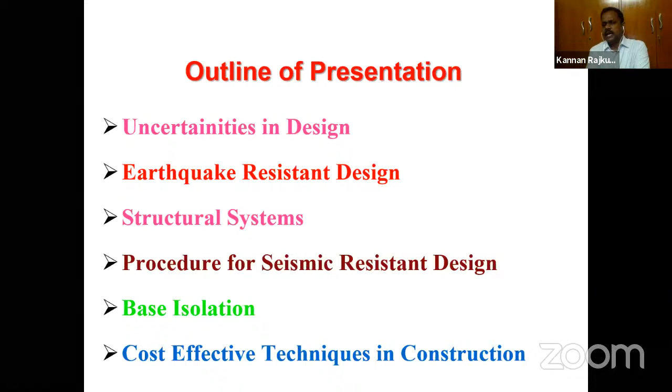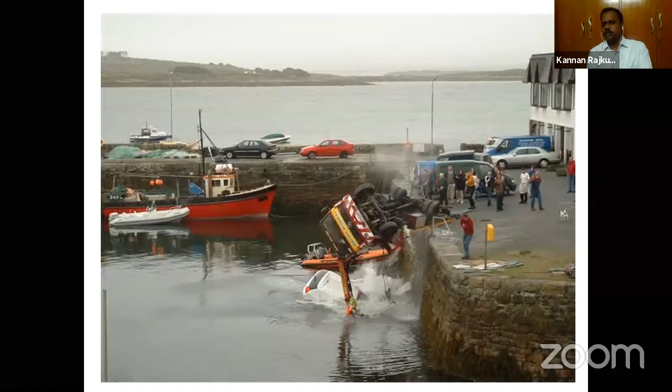And what happens next? You can see the car lifted to the higher side, then the entire crane has fallen into the system. So here the design engineer, or the crane operator, knew that the load carrying capacity would be more, but what happens is the load was accompanied by a moment. So this is uncertainty in design.

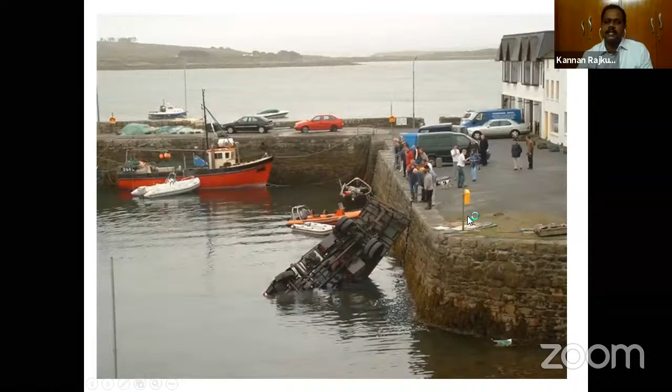So now what happens? Next slide. Again you can see a larger crane has come - say the load carrying capacity is a 20-ton crane. Again, now it is lifting the car. So here also P will be same, the moment will be same, but the boom has been designed in such a way that it can take a larger load.

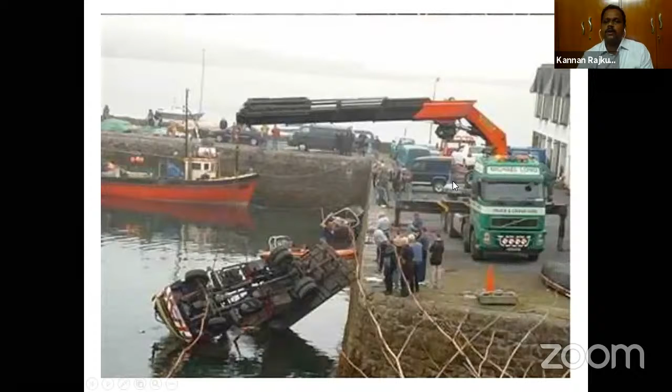Now this was successful. Next, again now they are lifting a very higher load. Earlier it was a very small car, a small hatchback car. Now it is again a larger wheel load - a lorry, being lifted up. And now you can see that the crane has fallen back into the river with the same maximum load.

Now from this we can know that the second crane should have come to lift up the car, and then a crane with larger capacity needs to lift up the crane - that is the basic idea. But basically we think that this is enough in carrying the load carrying system. A similar thing we'll try to orient along with the civil engineering field also. This slide I got from a Singapore professor regarding the loading criteria.

Now next, we start with uncertainties. What is meant by uncertainty? Some unexpected load, or there may be some unexpected errors which may not be brought to the knowledge of the engineer, either a civil engineer or a structural engineer.

Say for example, as a structural engineer, I do my own consultancy in college also. So we brought a drawing - say for example, in the drawing it is going to be G plus 2 story. I am designing it, and each story has been provided to me as 3.5 meter height each story. I design the columns such that each and everything is with 3.5 meter.

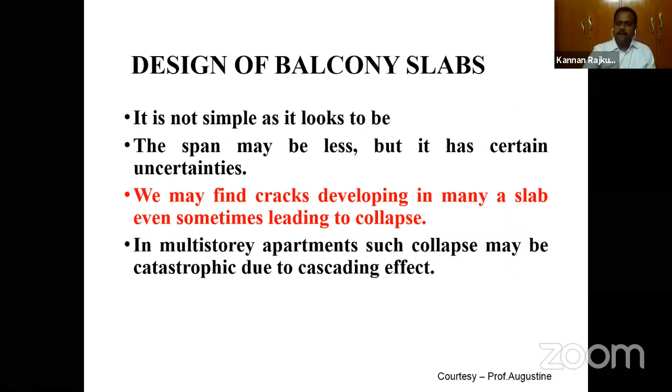Next, I'm going for pattern loading. Many of you who would have done some bridge design would have come across pattern loading. Pattern loading means in what pattern you are going to place the load. That is the criteria. Now, an example.

So here I'm having a full UDL, accompanied by dead load. Now I'm not discussing dead load, since dead load will happen to any structure anyway. So I'm having a full live load of 30 kilonewton per meter.

You will have two supports over here, so each support will take 120 kilonewton load. What will happen here? The maximum bending moment, exactly at center, is 120 into 2 minus 30 into 4 into 4 by 2. That will be equal to 0.

So what will happen now? If you're a young budding civil engineer or structural engineer, you'll think the bending moment is 0, so the maximum sagging moment is 0. You'll make sure you provide only minimum reinforcement at the bottom, without additional reinforcement, because the bending moment is 0.

Now, what will happen? A live load is going to be placed only at the center, because practically we can't control the live load. Say, for example, I'm having a small marriage hall, or say it's a longer span, and at both ends I'm having a balcony.

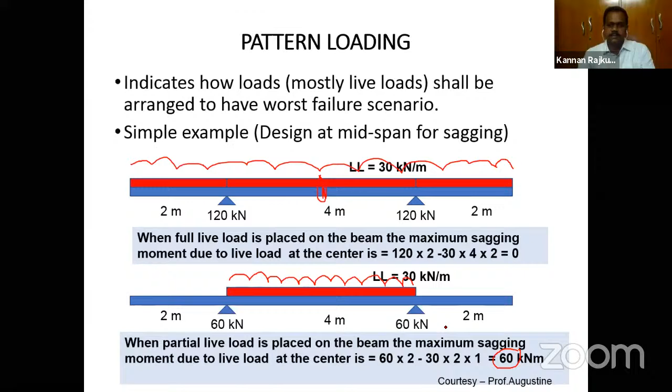So how to identify load patterns? Now we'll use the influence line diagram, the ILD. Actually, this type of loading we normally use to teach students, myself along with Professor Augustine sir, to introduce students to the different types of loading conditions.

For example, whenever the ILD goes on top, it is positive — just a simple example, since many of you don't know what ILD is. When it goes down, it is negative, which we call the hogging moment. Now, when load is placed over here, you will have maximum positive moment. When load is placed only at the overhanging, you will have maximum negative moment.

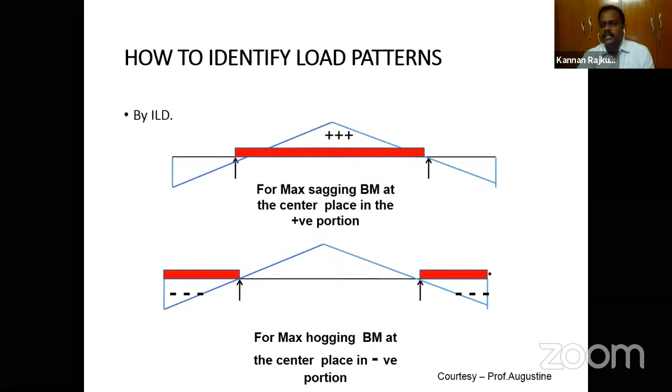So now pattern loading for beams. Say for example, I'm having a classroom, a continuous classroom, with equal spans. In the first hour, all students will be present in all classrooms, as in most colleges. But during the third or fourth hour, one classroom may be left free because it's a free hour, or the students have gone to a tea break or lunch break.

Here I'm assuming there is a hinge over here. So what will be the pattern of loading? This will be the pattern of loading. Here I'll be having a positive moment, here negative, and here positive. Now, the total load multiplied by the positive gives a maximum sagging moment, and here total load multiplied by positive also gives total sagging moment.

If you place a load over here, the total load multiplied by negative gives these two positive values. Say this is 1, this is 1, and this is 0.5. So 1 plus 1 plus minus 0.5 gives 1.5 as the total ILD. Since there is no load over here, the maximum sagging moment will be 2 when there is no continuous loading on the beams.

When you come to the second case, maximum hogging moment - where will you get it? Now I'm having two loadings, and these two classrooms are totally filled up, while the third classroom is free, and the fourth classroom is filled up again. Here I'll be having negative moment, and negative moment, so I'll get a hogging moment. Say this is 1, and this is 1, the total hogging moment will be 2. Therefore, a structural engineer should place the loads appropriately in the software to get the maximum hogging moment in this second case.

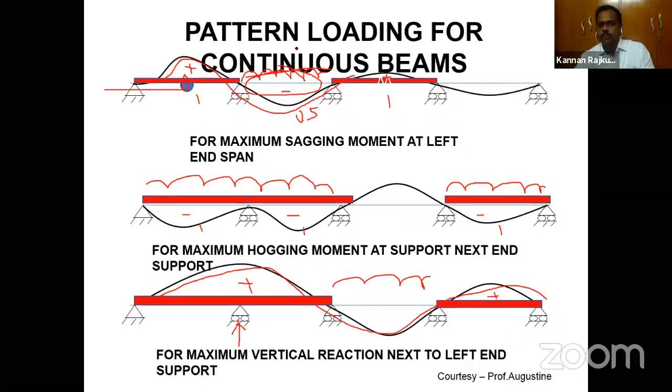So when you go for STAAD or any software, they do not cater this pattern loading automatically. It is the structural engineer's or civil engineer's responsibility to provide the loadings to the system appropriately.

When live loads are of higher magnitude and fluctuate between spans, the load position can become very critical. Pattern loading imposes more restriction on reinforcement because curtailment becomes very important - wherever there's tension we provide maximum reinforcement, and where there's compression we provide minimum reinforcement. The designer has to be acutely aware of this so the final design is safe under all conditions. Many unexplained structural crashes can be attributed to pattern loading.

So this is a small example - it's going to be a plinth beam. On the left hand side, I'm providing a brick wall, so the load may be 15 kN per meter. On the right hand side, the load may also be 15 kN per meter. In between, there will be an iron grill, which will be less than 1 kN per meter. This is a practical example where we can have pattern loading in a structure.

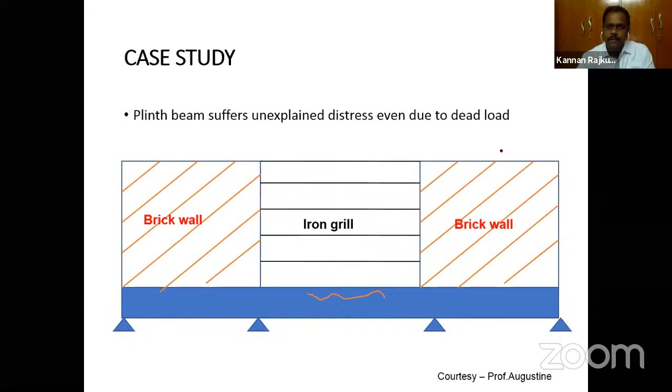So now I'll go for earthquake resistant design. Let me switch off my video.

Earthquake resistant design. So normally we know that all buildings are vertical cantilevers - I discussed something about cantilevers in earlier slides. All buildings are vertical cantilevers projecting out from the earth's surface. Hence, when the earth shakes, these cantilevers experience a whiplash effect, something like where you have maximum drift, especially when the shaking is violent. Hence, special care is required to protect them from this jerky movement.

So buildings are intended to be earthquake resistant. Normally most customers request that they need an earthquake-proof building, but a civil engineer cannot design an earthquake-proof building - he can design only an earthquake resistant building. So our intention is to design an earthquake resistant building. A building becomes more expensive if it's designed not to sustain any damage during a strong earthquake shaking, so normally we don't go for that first case.

Second case, they should be strong enough to not sustain any damage during weak earthquake shaking. Say, for example, in a local language, I say that Richter scale of 1 or 2. Okay, the loading will be very small. Therefore, it should not sustain any damage.

Third one is they should be stiff enough to not swing too much. It should be so stiff also. You should be able to swing and come back to the original position. We call it the elastic limit during weak earthquakes.

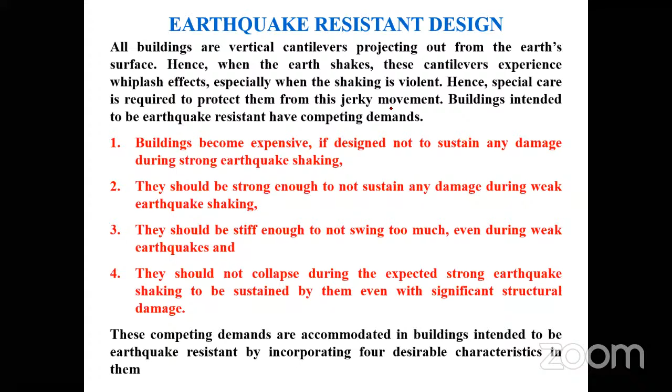So normally, if you want a building to be more earthquake resistant, the geometry should be good. Okay, the geometry, shape, etc. of the building should be good. Say, for example, a square plan or a simple rectangular plan, not a very long rectangle. Then what will happen? The center of gravity will fall within the base. Okay, so you can say that the inertia forces are transferred to the base without any bending effect.

So seismic analysis procedure, there are 2 methods normally what we know. The one is the equivalent static method. The other one is the response spectrum method. So the equivalent static method: effects of earthquake are considered as equivalent lateral forces. So everyone knows the formula. Base shear is equal to AH into W.

So AH is nothing but a factor Z into I divided by 2R into SA by G, depending upon the soil parameters. Z is the zone factor. I is the importance factor. R is the response factor. And SA by G is based upon the soil parameter, you will be getting a graph. Multiplied by the self weight of the structure.

So everyone knows Newton's law. Force is equal to mass into acceleration. Okay. So what is mass? Your W by G is nothing but your mass, multiplied by the acceleration, SA. Acceleration due to gravity. Okay.

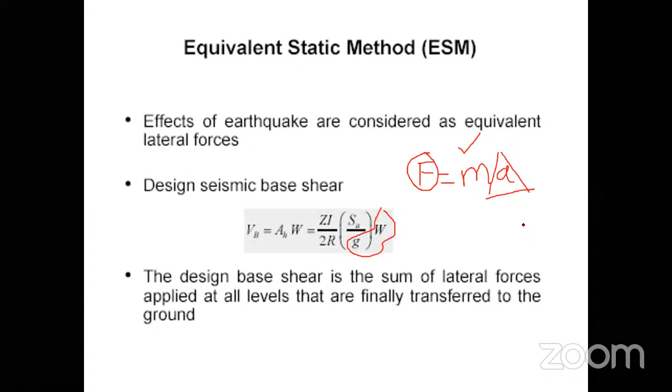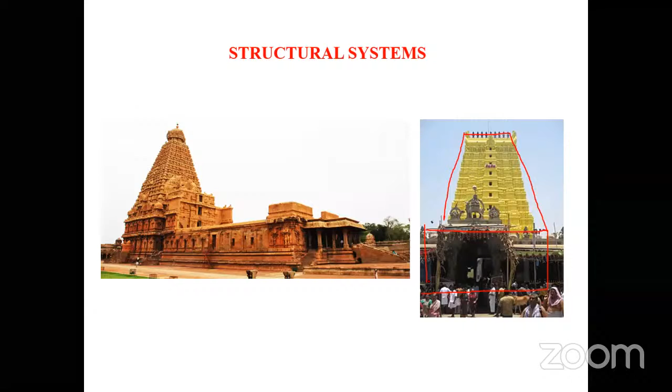So you are seeing most of the temples in South India or across India. You see that the base will be very large. When you're going towards the top, the mass goes on getting reduced. All temple gopurams. So here what will happen? The force at the base will be very less because of the reduced mass in the structure. This was designed long back by our ancestors in designing the temples. The same has been introduced in our structural engineering as a structural system.

Okay, a schematic plan. We normally call this a bundled tube, or a tube in tube type of structure. So each and every tube will stop at different heights. Therefore, the base shear calculated at the base will be very, very less.

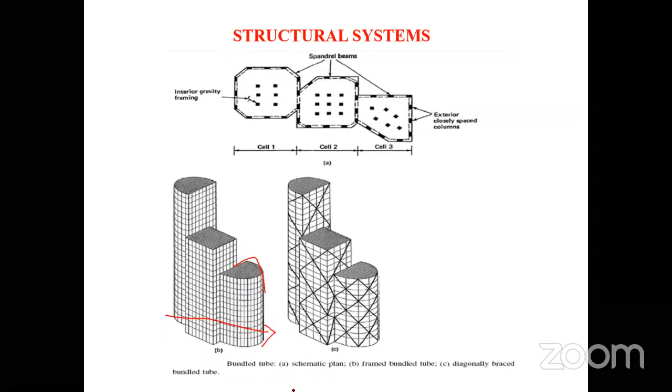So a practical example is the Burj Khalifa. I don't know how many tubes are there. From the literature I came to know there are 20 tubes. Each tube will stop at different levels. And at the end, there will be only a single tube projecting on top of the Burj Khalifa. Therefore, even though it is 160 stories and more than 700 meters, the structure is going to be more safe because of the reduced lateral force due to the reduction in the mass.

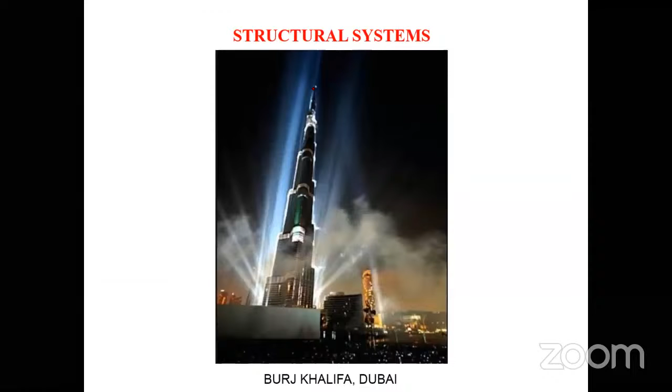So the procedure for seismic resistant design. What is the procedure? Most of you would have seen the earthquake tips by C.V.R. Murty sir and Sudhir K. Jain, who have done a lot of work on seismic resistant forces for the past 2 or 3 decades.

So let us make the plan very simple. I will give a practical example of why the plan needs to be good. In the first case and second case, the plan is a simple plan. Here, the corners are curves. We call these re-entrant corners. So the inertia forces flow to the ground level in a curvilinear shape. Therefore, there will be torsion created in the corners of the structures.

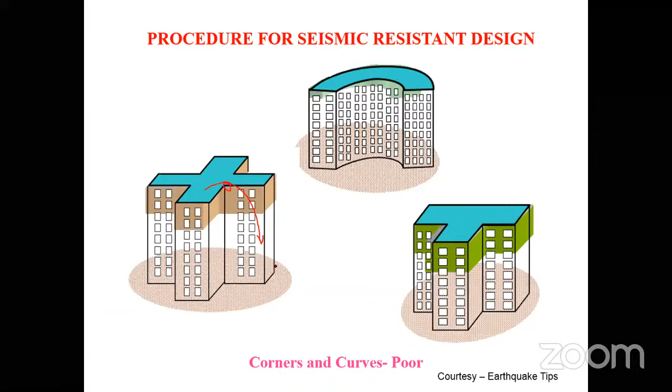Similarly for T-type structures. How to avoid these T-type structures? You just separate these two structures. One is a smaller rectangle, the other one is an L shape. The vertical part and horizontal part can be separated. Therefore, there won't be any pounding effect. Therefore, the re-entrant corners will be avoided, and the inertia force flow will be different from one part to the other part.

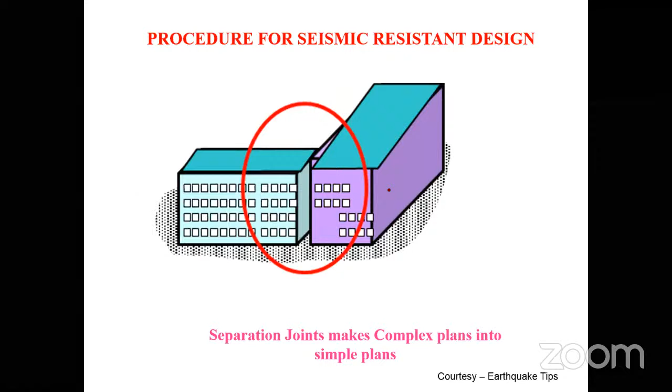So now you can see these are in the form of elevation. The previous case was in the form of plan. In the first case, the loading is not equal in all the columns, so this portion will be very high. Normally this is not recommended by structural engineers. Nowadays we don't design these buildings, because the promoters or owners need a very large area, so this type of plan is ruled out. These types of plans were common before the collapses in the 2001 Ahmedabad earthquake.

So very long cantilevers on top, and you'll have a weak flexible story. This is unavoidable nowadays. We have to go for a weaker flexible story, but make sure that you provide a shear wall, thereby reducing the shear forces coming onto the columns at the portico level. Similarly, there may be a tall column at the ground level for some other reason. You can make this column shorter by providing ties at different heights.

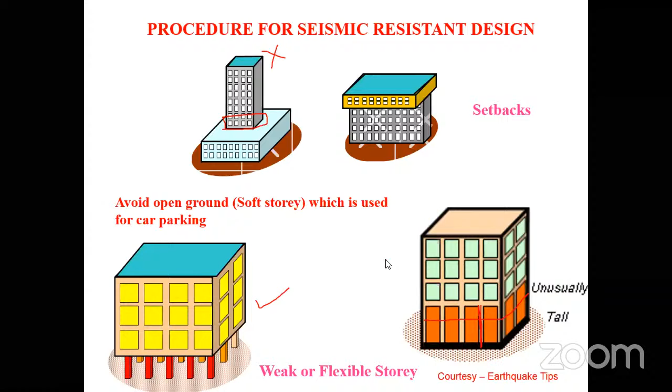We all know that the open ground story is like an inverted pendulum. As per the IS code, the total seismic load coming on the column should be multiplied by 2.5. Instead of multiplying by 2.5, if you provide a small shear wall at the base, the entire lateral forces will be taken care of by the shear wall, and only minimum forces, maybe even nil, by the columns, because the columns will be designed only for gravity loading, whereas the shear wall will be designed for the lateral forces.

So shear walls will take care of the lateral forces, and the gravity load will be taken care of by the columns. Therefore, columns will be slender in section, with no need to go for very huge columns for the open ground story.

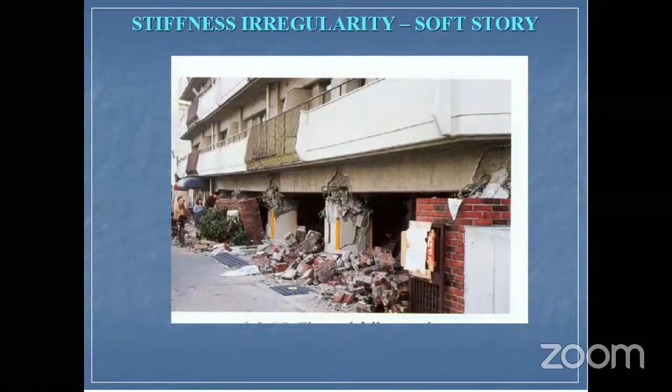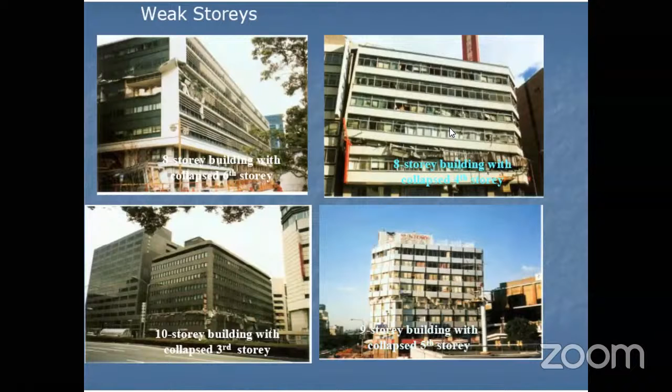These are some pictures of soft story collapse, taken before 2002. You will see many pictures like this. A soft story need not be only the ground story. It can be at higher levels also, say they suddenly want an auditorium on the 6th story or a very open hall on the 9th story. India has seen a lot of soft story collapses in the 2001 Ahmedabad earthquake. These are apartment collapses, soft story collapses.

Many of you used to see the collapse of a building as only a loss to the owner or the customer or to the engineer who built the building. But actually, when buildings of more than 10 or 15 stories collapse, there will be an economic curtailment in the country also.

I'll give a small example. At the time of the Ahmedabad earthquake in 2001, I was a PG student in structural engineering at Madras University. During the Ahmedabad or Bhuj earthquake, the prison wall collapsed. So what happened when the prison wall collapsed?

Some of the inmates had escaped from the prison. Say some few hundreds escaped out of the prison, by the time they barricaded the prison wall, because the prison compound wall is going to be a very long cantilever.

Normally during an earthquake, most compound walls or staircases collapse because they are very slender sections. You will not believe that within 1 hour, 99% of the inmates who escaped came back to the prison, because they cannot survive outside, since most of the structures collapsed in the Bhuj and Ahmedabad area, where they cannot even have a livelihood. That is the worst socio-economic condition in India, which was felt during the earthquake.

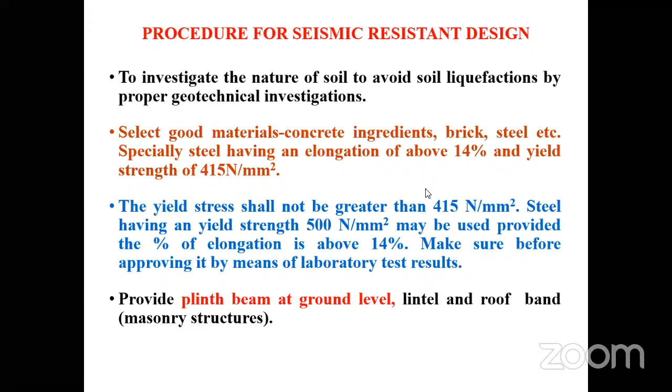So, we went to a competition in 2009 at IIT Roorkee. The competition was conducted by the University of Bristol from the UK in coordination with IIT Roorkee. They wanted students to have a feel of the earthquake. Mostly we say that we have a lateral force, a live load coming on the structure. So they wanted students to have a feel of the earthquake, so they gave a live competition.

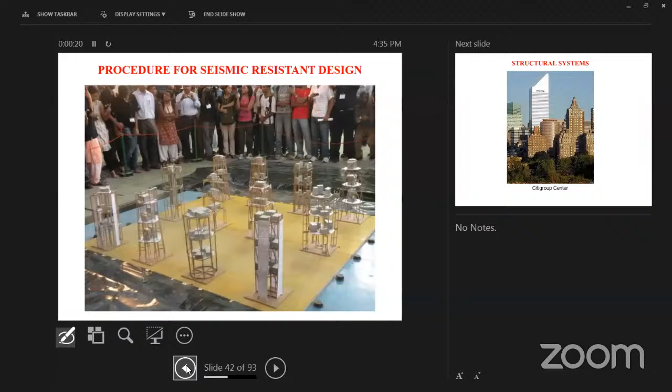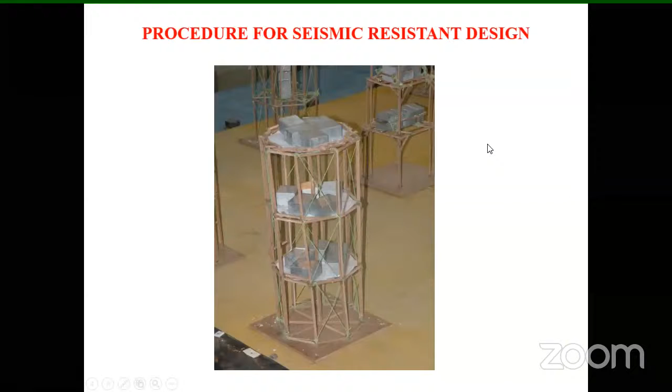Okay, now I'll show you some of the presentation video. One second, something has happened. I want to just end the session. Can you see the screen? Grisha? Yes, sir. We are able to see the screen. Only video 1, video 2 is coming. Okay. Yeah.

Yes. This is actually a live seismic shake table where the load has been applied to all the 12 participants who are participating across the country.

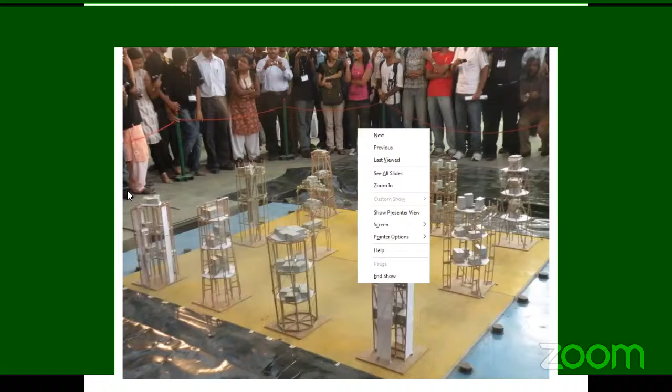Actually, in the presentation, you would have seen this corner structure which survived, but it was disqualified because they used more than 16 columns. As per the condition, the columns should be less than 16. They overruled that and went with 30 columns. You can see there were 30 columns there. Therefore, they were ruled out. Actually, they were the people which...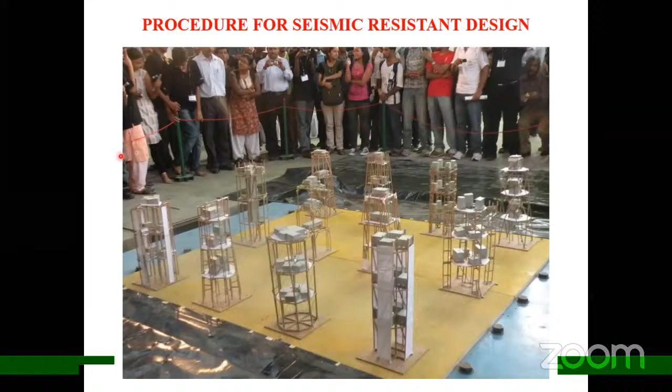Failure doesn't occur. So here you can see most of the structures. At the end, the jury gave the award to the third section over here, somewhere. This was Atlas, this was the winner.

You can see that most of the 12 structures over here did not provide a plinth beam. We were the only people who provided a plinth beam. That was the reason for surviving the shake table test.

Most of them thought about providing a plinth beam, but each and every stick costs nearly 4 lakh rupees as per the proposal, so they wanted to reduce the cost of construction. Therefore, they avoided the plinth beam and provided a lot of shear walls. Even though the shear walls were able to resist the lateral load, the most important thing is that all the beams should be tied at the lower level to transfer the forces from the lower level to the upper level.

So this small example I want to show you for the importance of a plinth beam. Again, structure system. Many of you would have seen that the Citigroup Center in USA is approximately an 80-story building, but it stands only on 4 columns. Actually, this was the history of what I studied from the internet. So this was the plot size.

At the corner of the plot, they had a small church. They wanted to construct an 80-story building. Normally, they ask the church people to sell the property, so that they will provide a church at a different place in USA. But the church people were so reluctant; they said we can't vacate the area. Then there was a lot of discussion going on, and then the church gave a different ruling.

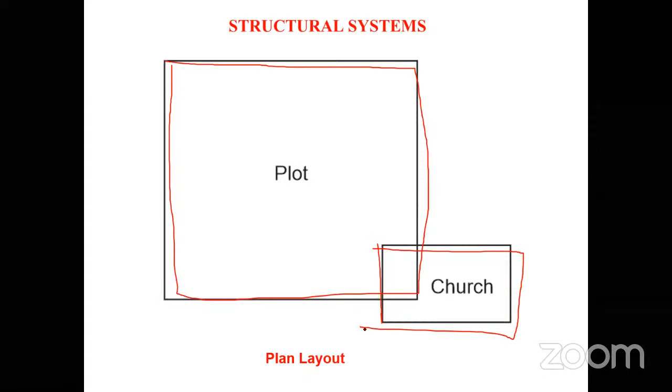They said you consider the 80-story building, but don't disturb the church area; instead you construct on top of the church. Understood? You can use my church area, don't disturb the existing church, but instead you can go above the church. Then this was the case they provided. The building stands on 4 columns.

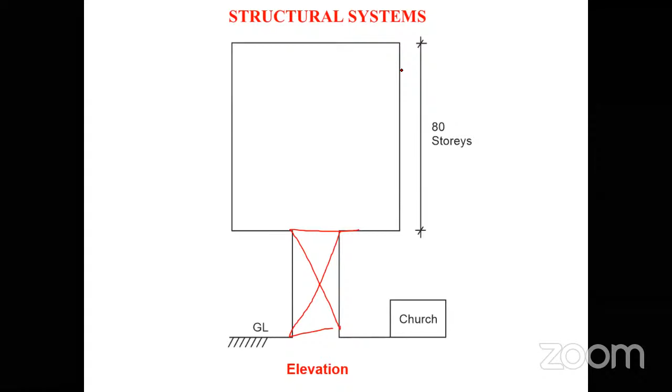So the system for 10 stories, there will be only a core area. So they have gone for a cantilever on top. On top there are 80 stories. So this was the column positioning. They had only 4 columns. In the center they had a core. So 4 massive columns.

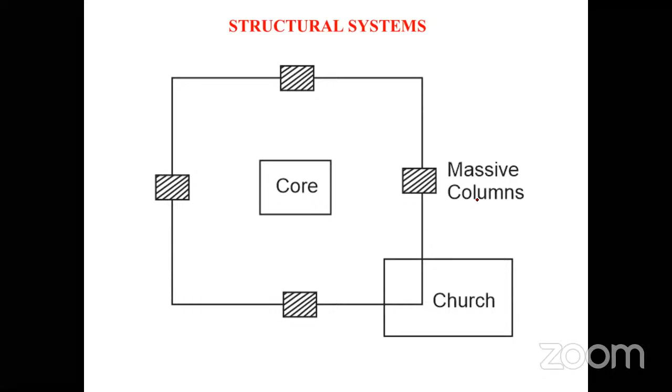We call this an outrigger structural system, where there are 4 massive columns. You will have very long cantilevers. Even though you see the cantilever, all are more stable because everything is balanced. It's again a balanced cantilever. So this was the shape of this system.

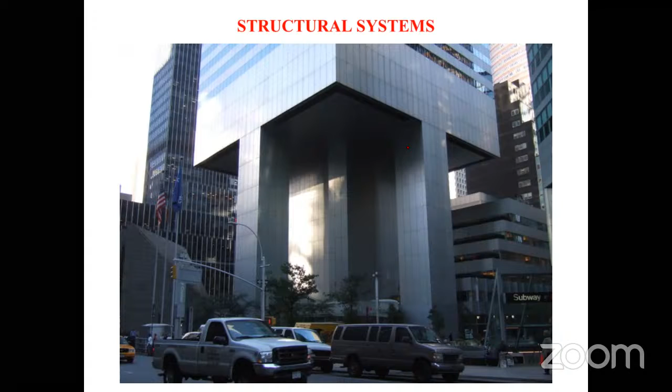Again, the difficulty they faced was the core system. Core means we have a staircase core, we have an electrical core, and then we need a lift core. The number of lifts they expected was 8 lifts of larger capacity, but they had space only for 4 lift cars. So they planned a double-decker lift. Simultaneously the door will open at the ground level as it opens at the first floor level. You can assume a double-decker bus. Like that it has been developed.

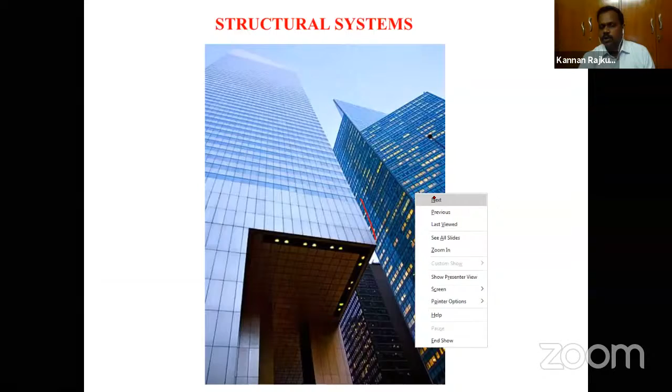So you can see the height of the structure. Here the beam depth will be more than 5 or 6 meters, where they have gone for a transfer girder type of system. From the transfer girder, they use the outrigger type of system, where beyond this the column size would have been reduced. Again, you see that the building rests only on 4 columns. There are different types of views you can get on the internet. Citigroup Center in USA.

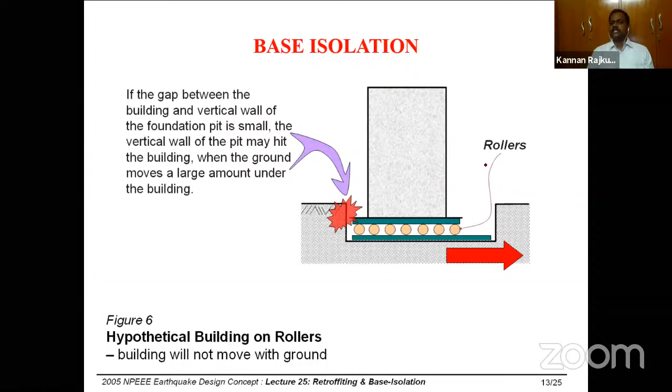Next, I go to base isolation. What is base isolation? To isolate the superstructure from the substructure. When there is going to be a roller, we are going to place it below the superstructure. Then whenever there is ground shaking, the inertia forces transferred to the superstructure will be very, very minimum. The hypothetical building on rollers.

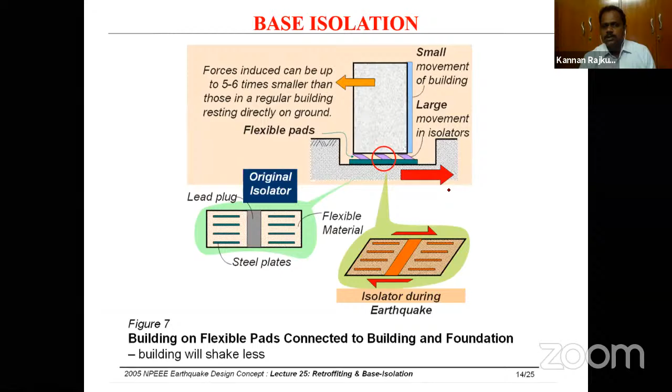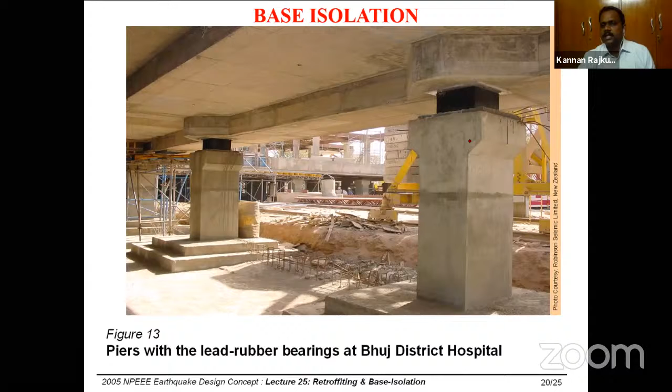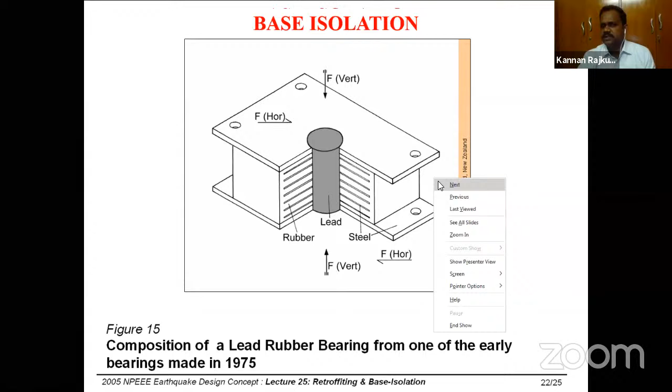Therefore, the substructure will be able to take the maximum load, providing minimum disturbance to the superstructure. There are a lot of lead rubber bearings coming up today for vertical force and horizontal force, and nowadays they provide even active systems and passive isolation systems. Many are coming up. This is again the reinforcement protruded from bottom to top.

So this was a small photograph I want to show to the participants. This I got from Professor A.R. Santhakumar sir, where he physically visited the 2001 Bhuj earthquake, where this building is approximately a 10-story building. You can see the foundation size. It was hardly 1 meter by 1 meter.

And then they have provided a pedestal, and you can see the column size. This is the foundation what they have provided for a 10-story building. So this building survived for nearly 8 to 10 years. Then only it has collapsed.

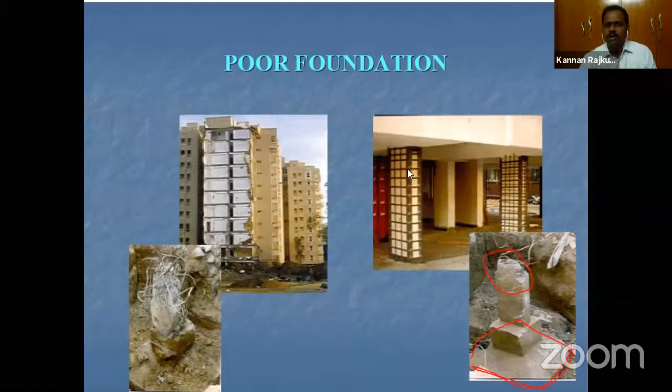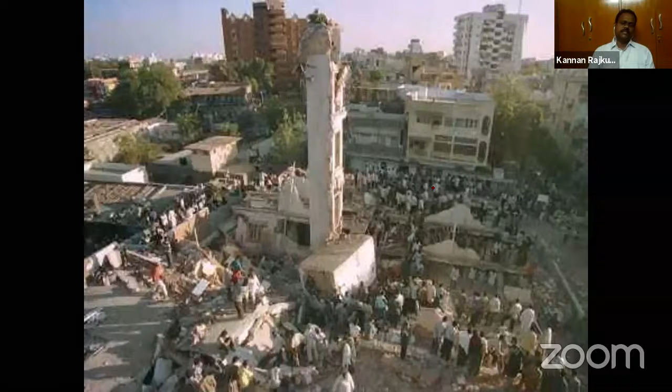Then there are a lot of retrofitting. You can see there is a shear wall provided to the structure. But normally, whenever you provide a shear wall, the shear wall should be interconnected to the gravity system. Here you can see the shear wall is very safe in resisting earthquake, but the surrounding structure has collapsed.

Next is about the cost-effective technologies. I think I'm not running out of time.

Cost-effective technologies. Why do you want to go for cost-effective technology? Because nowadays many people invest more money on a structural system, or they're providing the masonry infills, and then they use air conditioning to cool the structure. They get the bricks from a long distance of say 30 kilometers, 20 kilometers. Then what happens to the diesel consumption? The environment is getting depleted. So with the locally available material, we can construct the buildings.

So actually I have worked along with Professor Sakti Rajendran from Tanjore, who has got a lot of structures, and he shared this PPT with me some 5-6 years back. And I also worked on some 3 or 4 buildings on cost-effective technologies after having consultation with him.

So why do you want to go for this technology? Because everyone knows that the land is only 29%, the water is the remaining 71%. Out of the water, only 1.6% is potable water used for drinking. And this drinking water we use for buildings, in construction, we use it for bricks.

Then we get lime as a natural source, and cement, where we release carbon into the atmosphere, and then paint, granite, everything is natural material. We deplete it for use in the construction industry. How to reduce these possibilities in the structure?

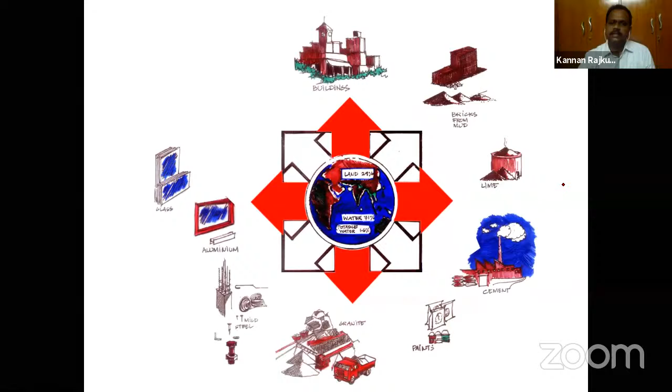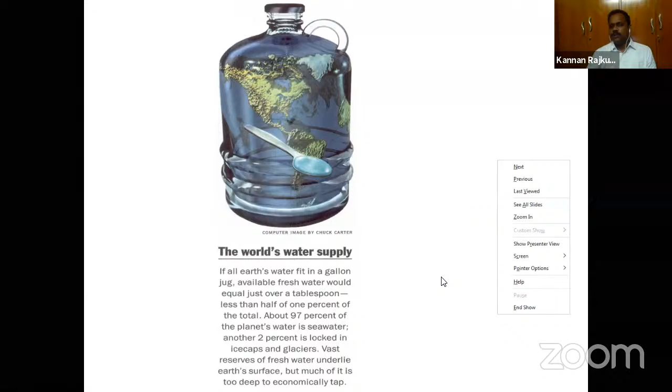So now, for example, this is the example given by Chuck Carter. If all the earth's water can be filled in a gallon, only 1 tablespoon can be used for drinking. That's the example I have given over here.

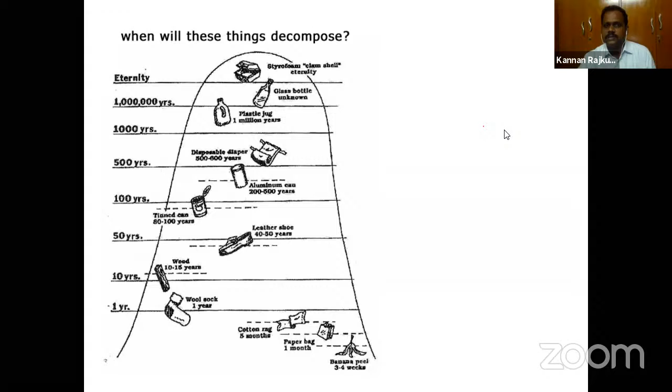So I'll take two cost-effective technologies over here. One is a rat trap bond, the other one is filler slab. Whenever we design a small structure, I'm not talking about a very high-rise building, I'm talking only about a 2-story or 3-story building, we will be designing the outer walls as an English bond. Normally we know that these bricks are good enough as a thermal conductor.

So now what happens? There is going to be a high temperature outside. A large portion will come inside the house. To avoid this, we use air conditioning. How to avoid this without using air conditioning? That is what was proposed by Laurie Baker in Kerala.

He has used a rat trap bond. Rat means Eli; in Tamil we say Eli. Rat trap bond, where a rat can be trapped. So this again is a 9 inches wall. This again is a 9 inches wall.

So you will have 2 bricks placed like this, and then I'll be having a 3rd brick coming up over here. Again, I'll have a continuation of this course.

Again, I'll be having a brick lining over here. This is total 9 inches. So this will be 3 inches, this will be 3 inches, and in between you'll be having a 3 inches cavity, when it's going to be the upper course.

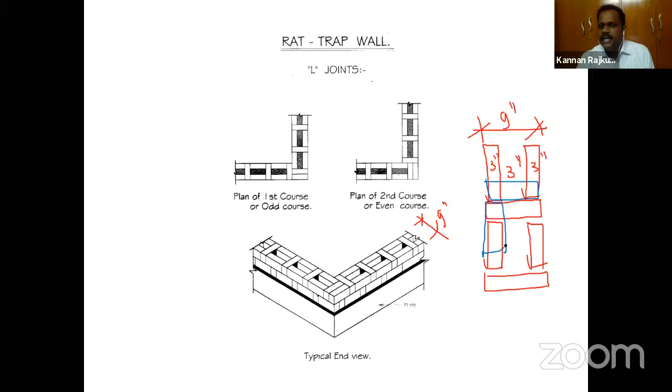So I'll place a single brick over here, then I'll be having a continuity of bricks over here. Therefore, as we say, in English bond the vertical joints will not be continuous. This is how we go for the system. So you can see over here, in between we'll be having a trap over here.

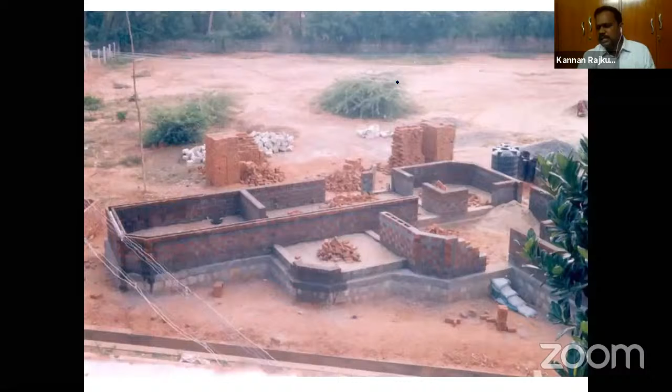As recommended by engineers, when you use a filler rat trap bond, it is acceptable only for G+1, 2 stories. Instead, nowadays when we go for G+3 buildings also, we provide columns. All the loads will go to the columns, and then these outer walls alone can be designed as rat trap bond in order to increase the thermal comfort inside the structure. The major aim is to increase the thermal comfort.

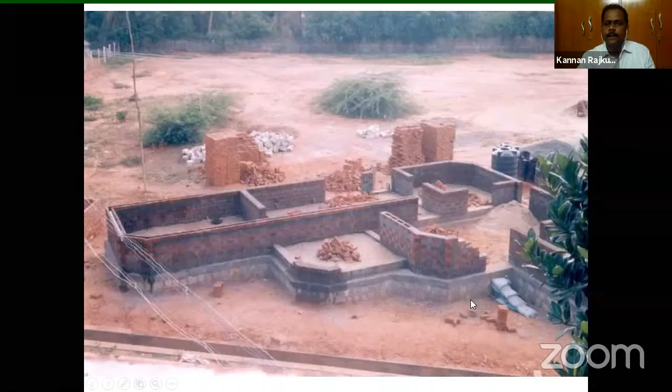I'll show a small video of how they place the rat trap bond. You can see the vertical alignment - each and every course is disturbed. It is not a vertical alignment; it will not be uniform.

In this case of rat trap bond, we go for English bond comparison. We use 1000 bricks in English bond, but in case of rat trap bond, you will have a reduction of 220 bricks. But here, normally if we use English bond the mortar is 1:7 mortar, am I right? Now here we have to use 1:3 mortar to increase its strength because the contact area is very less.

So nowadays many people don't use brick masonry as a structural material. But the advantage of using brick as a structural material is - whenever you have a lintel over here, the load is getting disturbed. Instead, we go for a corbelled arch where the load flow will not be disturbed, or we go for a semicircular arch, and again a Roman arch.

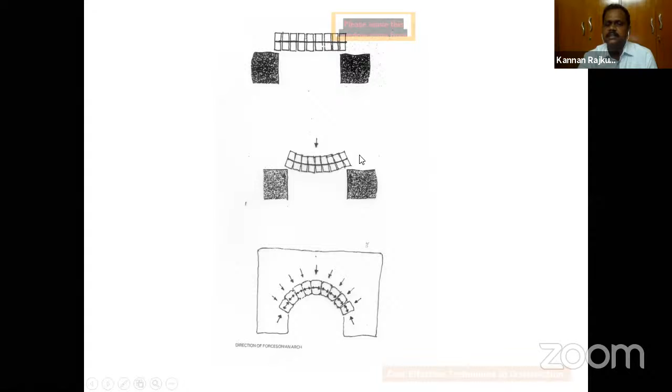Again, catenary curve - you can see. Again, you can see the first case at top - I'm having a lintel, bricks tied by a small thread rod. Instead, what will happen? It will bend like this, there will be tension at the bottom. Instead, what you do is make it as pre-compression. You provide an arch where the arch is good in compression and brick is also good in compression. Both will act together as a monolithic structure.

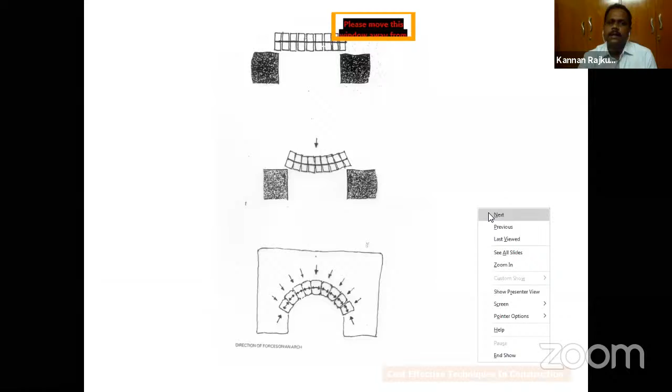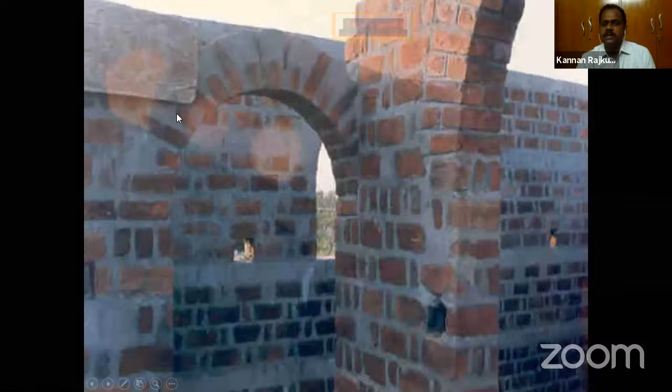So here, as provided by Rajendra sir, this was the formwork that was placed over here for an arch. Then the entire arch has been completed. There is no reinforcement at all.

Again, we have designed a staircase itself as an arch, without any reinforcement. You can see, so elegant from my point of view. Because again here the mortar strength is more - it is 1:3 mortar strength.

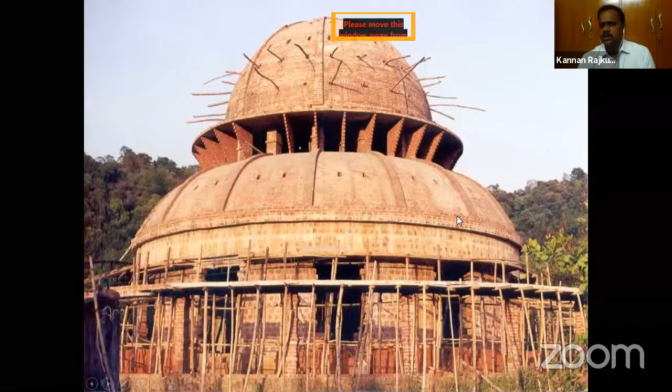So he has done a lot of domes. You can see there is no concrete at all coming up in the picture. You can see the entire structure - there is no concrete at all coming in the picture.

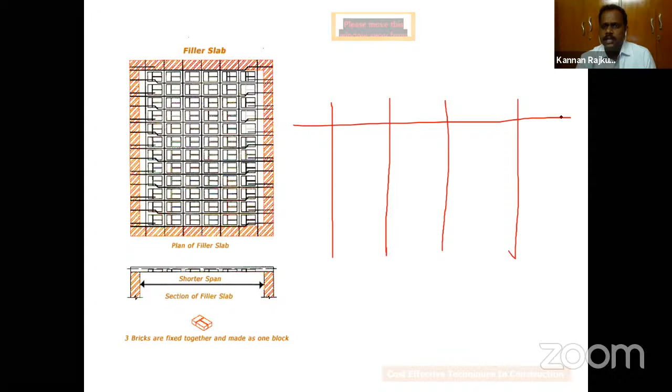Next, about filler slab. Say for example, now I'm having a reinforcement - I'm drawing a reinforcement pattern. So this is reinforcement in a slab. Now the stress diagram.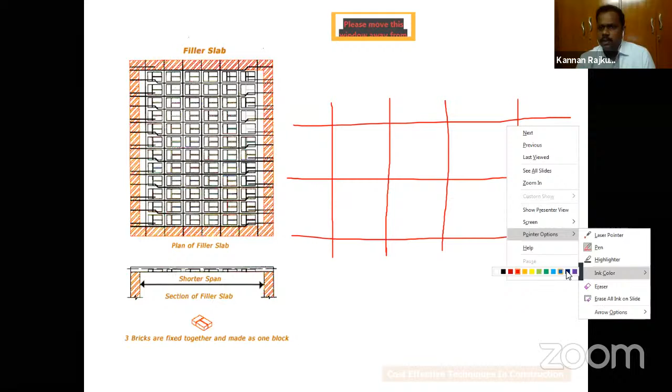Stress concentration for a reinforcement - this is the stress concentration. Near the reinforcement, these are the forces where you have maximum stresses. At this zone you will have maximum stress, and again this zone also you will be having maximum stress. What happens to this zone in between? There is no stress at all. So why do you want to put a large amount of concrete over there?

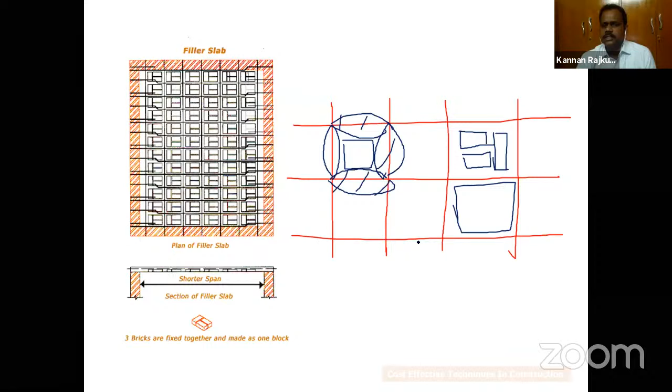Instead we provide bricks over there. Instead you provide some bricks over here. This is what normally I recommend, but many people instead of bricks go for Mangalore tiles. So it is up to the engineer, what is his choice.

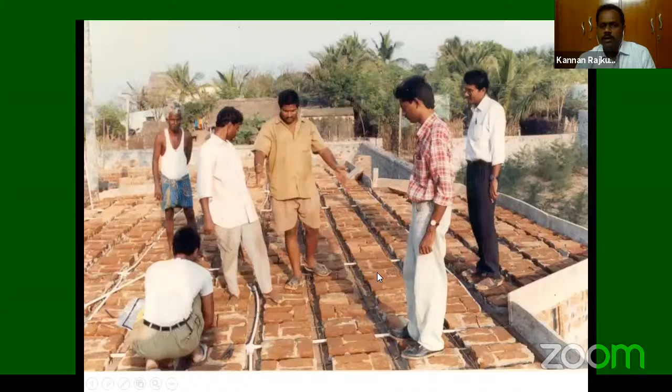So here you can see we place a lot of bricks over here. In between we have reinforcements, and then we provide even an electrical pipeline also in between. So the concrete needs to be good concrete, and the reinforcement and slab thickness will be more than 150 mm, minimum 150 mm, because the thickness of the brick itself will be 75 mm, 80 mm. And the concrete should not be dropped from a height of more than 2 meters. It should be dropped very gently as they bring it down.

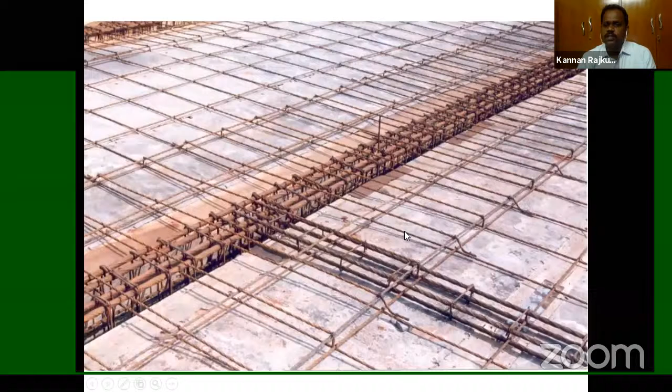So this is a reinforcement pattern. This is how we have placed the reinforcements.

The major advantage over here is since the brick is good in thermal insulation, when you provide for the roof slab, the total heat generated outside, only minimal comes inside. And here also, even for the sunken area, they provided bricks. But normally I don't recommend going for a filler slab for a sunken area. Instead, for those sunken areas, you should go for normal RCC concrete, due to the problem of water percolation. Here you can see how they place the reinforcement, how they place the concrete, everything.

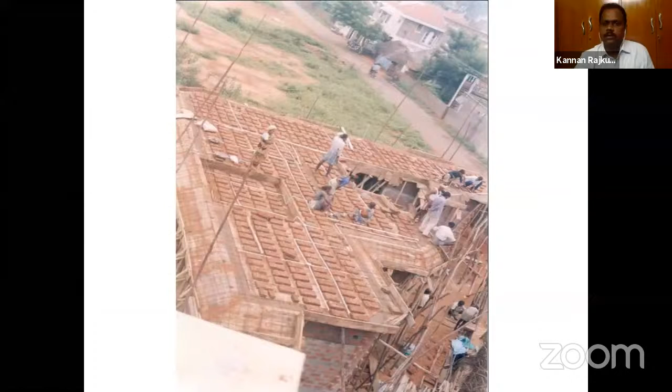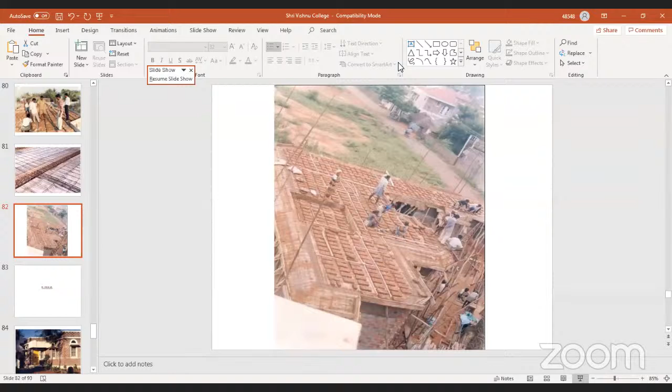Sir, proceed, sir. Yes, sir. Hello. Yes, sir, coming here. Yeah, yeah, let us see now, sir, whether it is coming up. No clear, sir, video? Again there's a problem. Am I right, sir? I think the video format might be the problem, sir. Okay, I'll send the video once again, sir. Okay, maybe I'll send you by Google Drive. You can share it. Actually, the major aim of this, can share this. Yes, sir.

So now what will happen after concreting? The entire bottom surface, you can see the bricks projected outside. You can just do simple plastering. The major advantage of using this rat trap bond and filler slab together is you can have a normal room temperature of 27 plus or minus 2 degrees centigrade, even in winter season or summer season. But to maintain this temperature otherwise, we normally use air conditioning.

So here what happens? The total cost of the building, as we've done some 3 or 4 buildings in Chennai, the total cost of construction came down by 24%, exactly 24%, when compared to normal conventional construction. And they have not used any air conditioners in their homes. So there is a significant reduction in the electricity bill also. That is the major advantage of going for rat trap bond and filler slab.

In some cases, if you can't go for a rat trap bond, you can go for a filler slab. Locally we call this the Madras terrace roof. Most of you will see across India, before the 1980s and 70s, they used to have only the Madras terrace roof. The same concept of Madras terrace roof has been developed into a filler slab. This technology has been approved by CPWD as well as Tamil Nadu Public Works Department and most government organizations. So people do not have that much awareness of this technology.

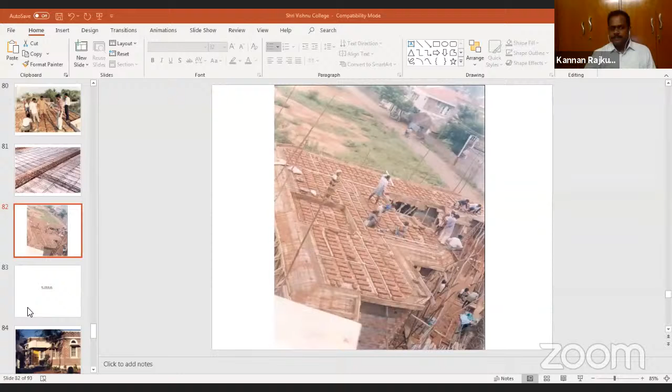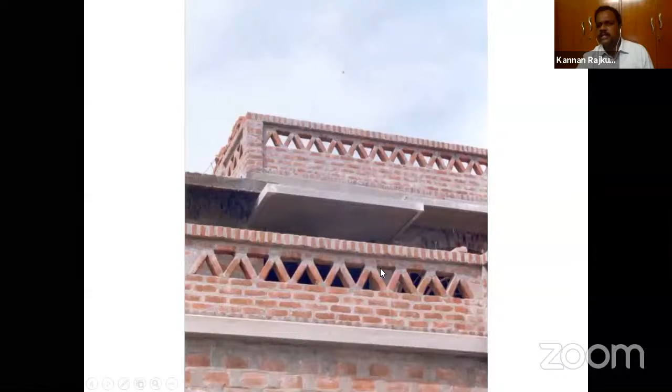These are some of the constructions just been done by Sakti Rajendran sir in Tanjore. You can see that it has not been plastered at all. This has been surviving for the past 30 years, nearly 3 decades. This is again the building from the other side of view, where you can go for elegant simple designs using a brick pattern.

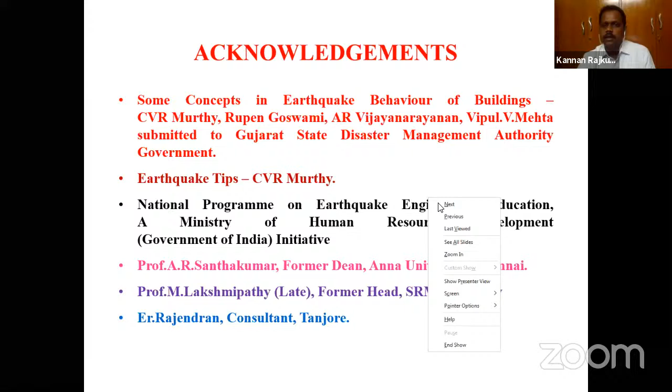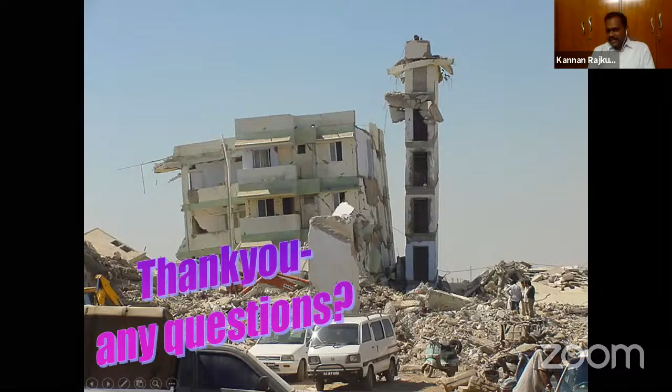So earthquakes do not kill people, only improperly designed structures do so. Thank you. Any questions? I'll be highly grateful.

I'll take the questions, I think so. I'll stick to the time. Sorry, I could not share the last video, but anyhow I'll share it to Girish Kumar sir either by WhatsApp or Google Drive. Thank you, Girish Kumar sir. Okay, I'll share this. Yeah, very nice session, sir. Yes, Pujita, go ahead.

Thank you very much, sir. We will wait for a while for some questions. Okay sir, I think so. Are you able to see the chat box, sir? There are a couple of questions in the chat box. You can see. Yes, sir.

Coming up, sir: what is the cost of the lead rubber base isolation system? I think in 2004, when they constructed it, it was approximately 5 lakh rupees per lead rubber. So it depends upon the size of the lead rubber. Now, with a recent presentation, I came to know from L&T that they reduced the cost of this lead rubber to 2.5 to 3 lakh rupees after a lot of research has been done. In 2003-4 very few people were using this lead rubber, but many people have started using it in important structures like lifeline structures such as hospitals. Most of the AIIMS hospitals are using the lead rubber system. I think now the cost would have come down further. It depends upon the size of the lead rubber, the number of stories, and what load is coming on the lead rubber. It will not be a standard value.

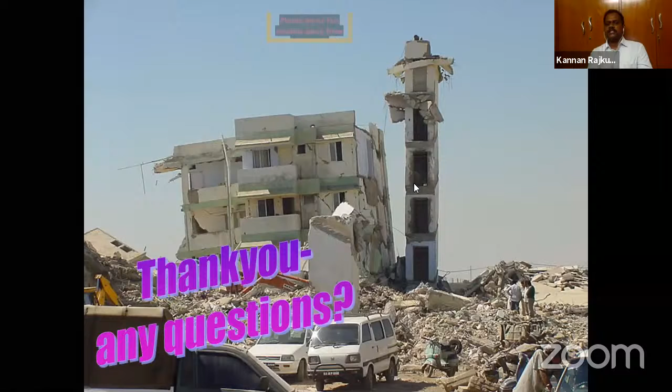What kind of seismic resistant design is necessary for industrial structures where heavy loading and complex geometry exist? Whenever there's heavy loading, there's no other go. We have to make the structure robust, and then we can provide shear walls. In the most extreme case, we can provide bracing. Normally, people don't go for heavy loading upstairs in industrial structures. Normally, they don't go for G+1.

Most industrial structures have heavy loading only on the ground. They plan it such a way that heavy loading is only on the ground, not at the upper level. If they want to plan the upper level, there's no other go. We have to go for a robust structure by providing shear walls. I think that will be the best idea.